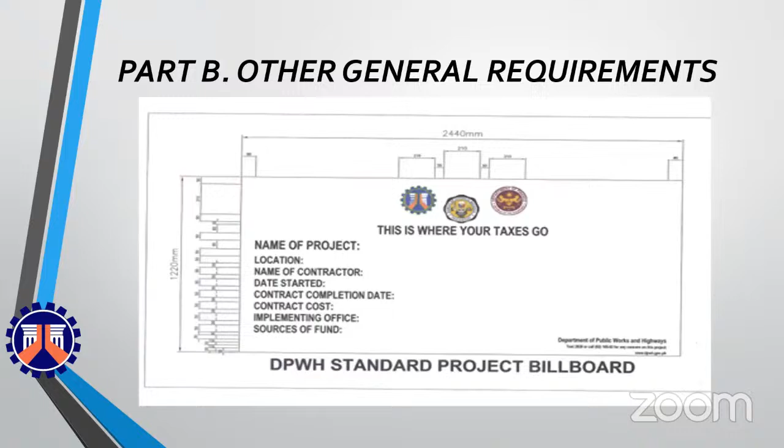Minimum material testing equipment for medium contractors, for contract ID numbers 24D00174, 24D00179, 24D00180, 24D00105, 24D00132, and 24D00100. Showing you the minimum materials testing equipment for medium contractors.

For contract ID number 24D00174, asphalt overlay along Daang Maharlika, Atimonan, Quezon. Showing you the project site.

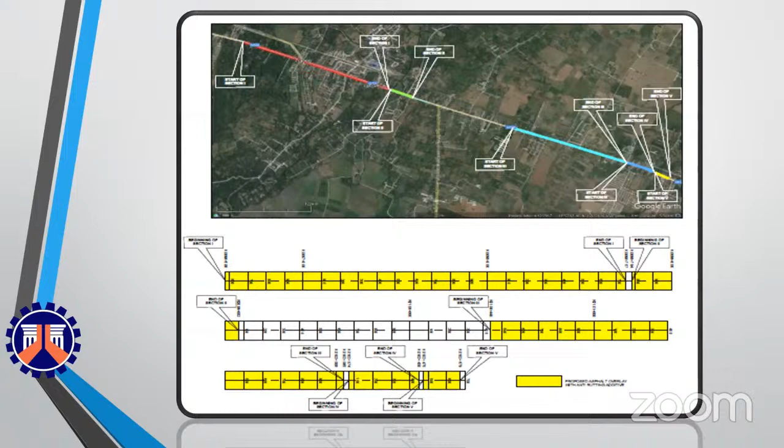Equipment requirements. Showing you the minimum major equipment requirements for the contract ID.

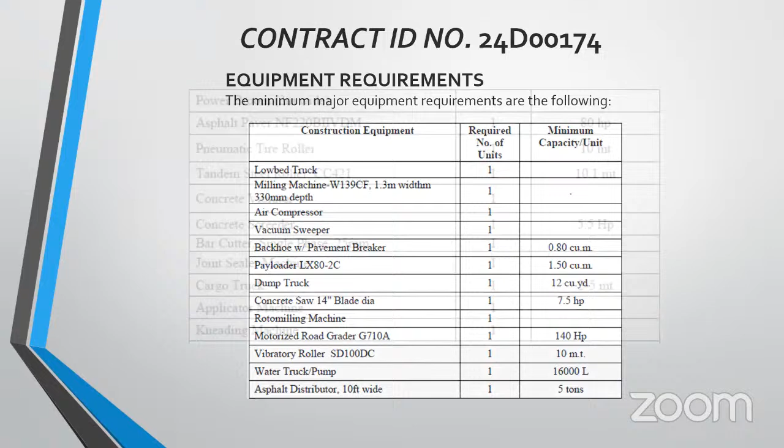The approved budget for the contract is 38,600,000 pesos, and the contract duration is 90 calendar days.

The source of fund is FY 2024 GAA for DPWH Infrastructure Program.

Scope of work: the scope of works involves finishing and other civil works, and electrical and auxiliaries.

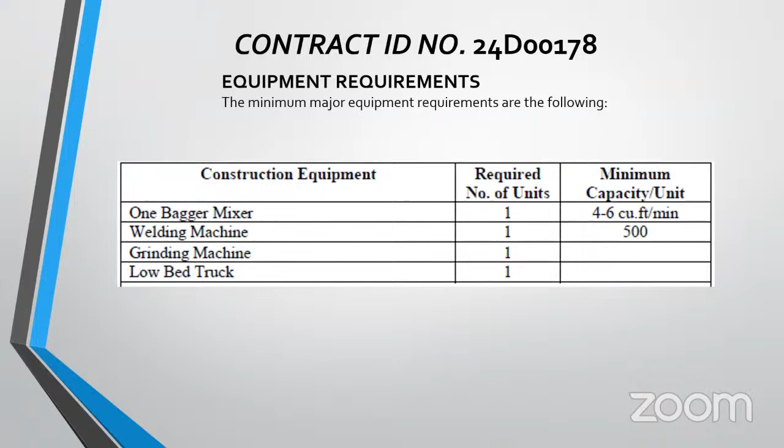The approved budget for the contract is 19,300,000 pesos, and the contract duration is 180 calendar days.

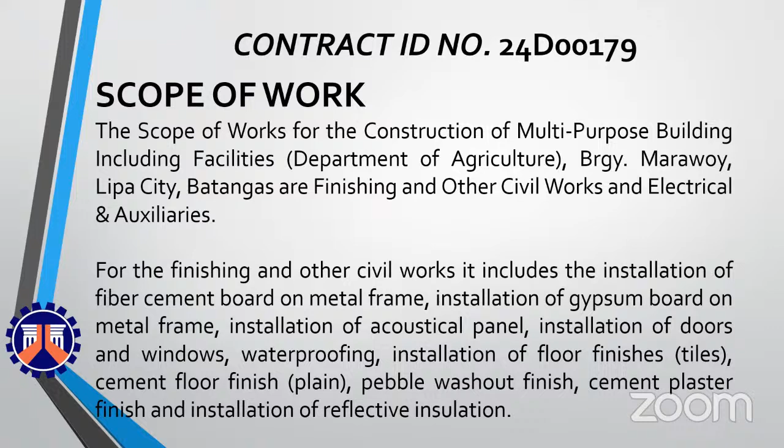For the electrical and auxiliaries, it includes the installation of intermediate metal conduit, diameter from 15 mm to 100 mm, installation of flexible metal conduit, boxes and fittings, and also installation of electric wires and other wiring devices.

Installation of panel board with main and branches breakers, of ground system, of ventilating equipment, air conditioning, ventilating system, automatic fire sprinkler system, and installation of fire hose cabinet and fire hose valves with cap.

Equipment requirements. Showing you the minimum major equipment requirements.

Manpower requirements. The minimum work experience requirements for the key personnel are the following.

The approved budget for the contract is 49,500,000 pesos, and the contract duration is 300 calendar days.

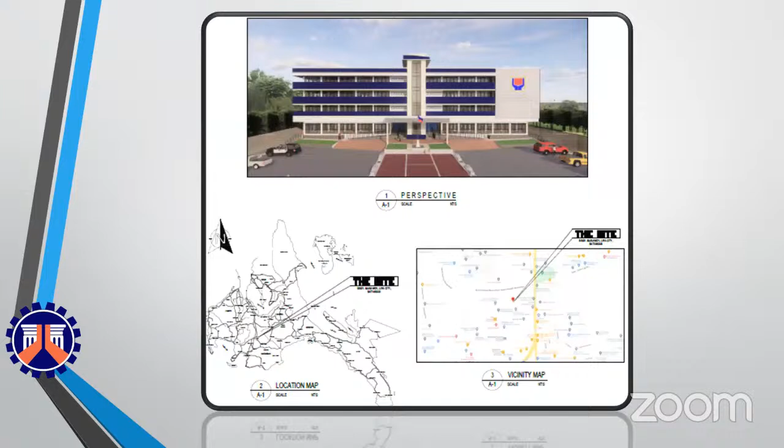For contract ID number 24D00180, construction of multipurpose building in Lipa City, Batangas. Showing you the perspective, location map, and vicinity map, and showing you the floor plans.

Scope of work. The scope of works for the construction of multipurpose building are earthworks, plain and reinforced concrete work, finishing and other civil works, and electrical and auxiliaries.

For earthworks, it includes clearing and grubbing, structure excavation, embankment, gravel fill, and site development. For the plain and reinforced concrete works, it includes structural concrete, lean concrete, reinforcing steel, formworks, and false work.

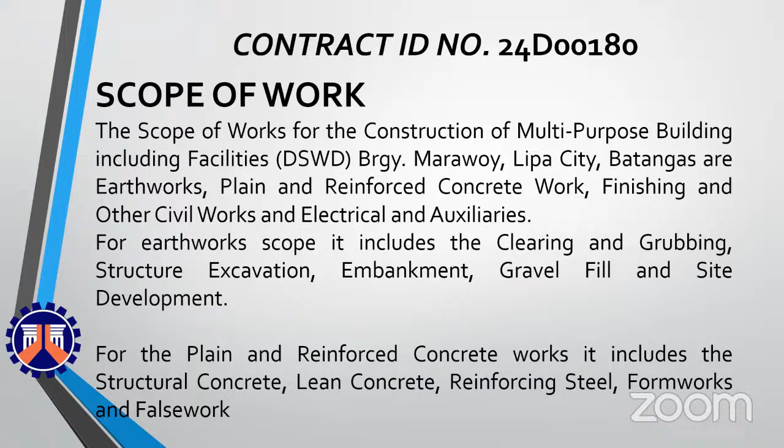For the finishing and other civil works, it includes soil poisoning, damp proofing, catch basin, hollow steel door, fire-rated exit steel doors and frames, aluminum framed glass door, aluminum glass windows, wood panel doors, roll-up door, tempered glass, waterproofing, glazed tiles and trims, unglazed tiles, cement floor finishes, cement plaster finish, painting works, CHB non-load bearing, louver blocks and railing.

For the electrical and auxiliaries, it includes fittings and accessories, wires and wiring devices, panel board, generator, lighting fixtures and lamps, network cabling, ventilating equipment, water pumping system, automatic fire sprinkler system, fire hose valve with cap.

Equipment requirements. Showing you the minimum major equipment requirements. Manpower requirements. The minimum work experience requirements for the key personnel are the following.

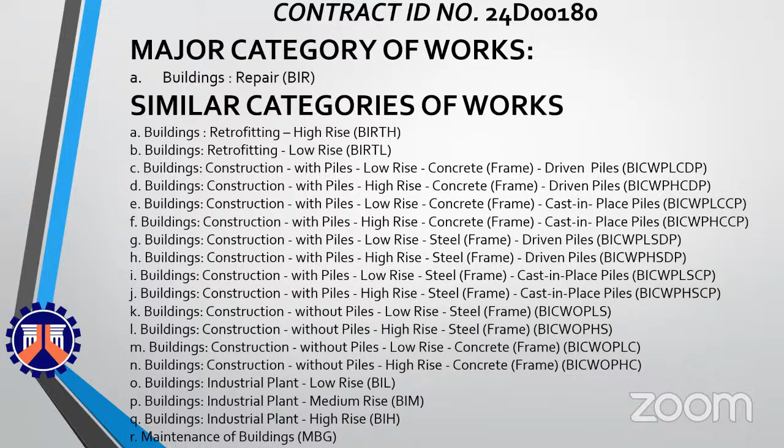The approved budget for the contract is 49,500,000 pesos and the contract duration is 300 calendar days. Showing you the major and similar categories of works.

The source of fund is FY 2024 GAA for DPWH Infra Program. Per contract ID number 24D00105, asphalt overlay along Daang Maharlika. Showing you the vicinity map and key map, as well as plans.

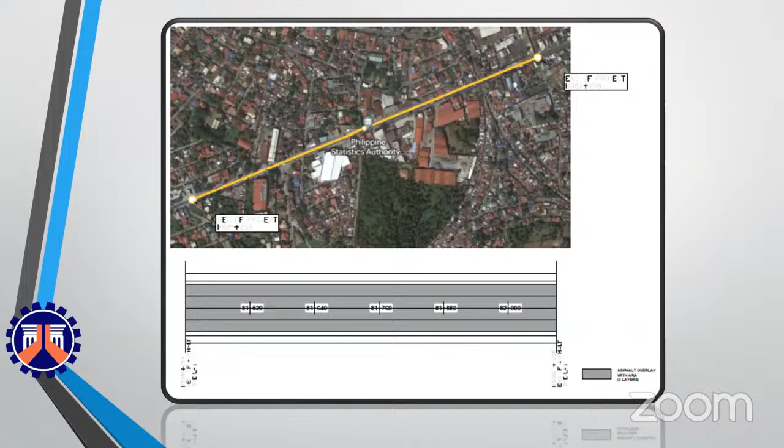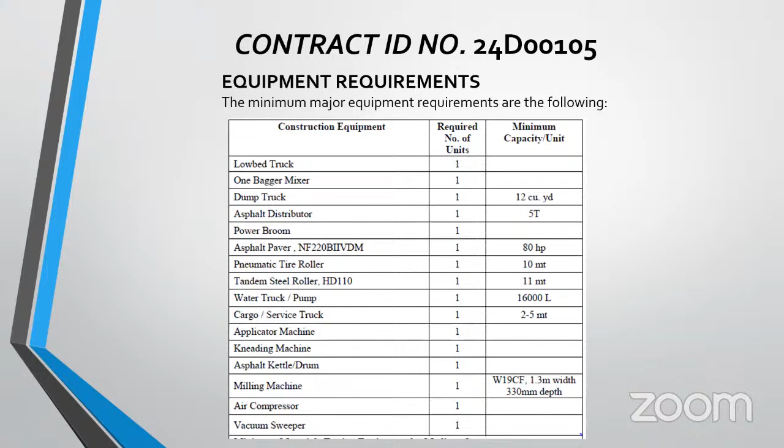Equipment requirements. The minimum major equipment requirements are the following. Manpower requirements. The minimum work experience requirements for the key personnel are the following.

The approved budget for the contract is 76,445,370 pesos and the contract duration is 165 calendar days. Showing you the major and similar categories of works. The source of fund is FY 2024 GAA for DPWH Infra Program.

For contract ID number 24D00131, asphalt overlay along Daang Maharlika. Showing you the project site.

Scope of work. Asphalt overlay on 4 lanes using emulsified asphalt, bituminous concrete surface binder course, bituminous concrete surface, hot laid 50 mm thick, and with pavement milling.

Equipment requirements. The minimum major equipment requirements are the following. Manpower requirements. The minimum work experience requirements for the key personnel are the following.

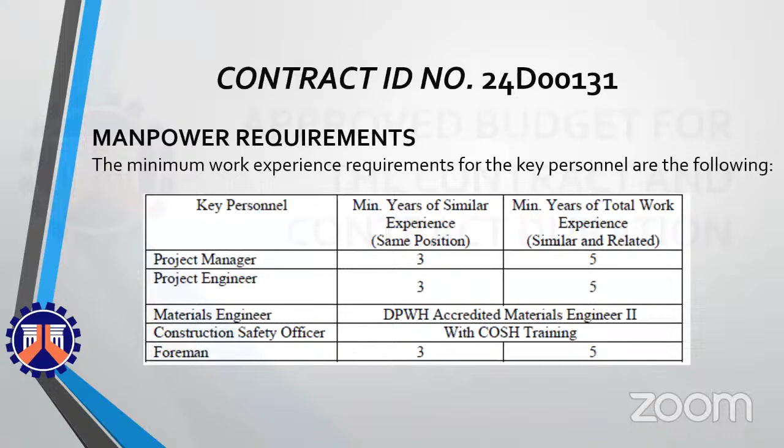Proposed asphalt overlay of 4 lanes using emulsified asphalt, bituminous concrete surface binder course, hot laid 50 mm thick, bituminous concrete surface wearing course, hot laid 50 mm thick, and bituminous concrete surface with anti-rutting additive, hot laid 50 mm thick.

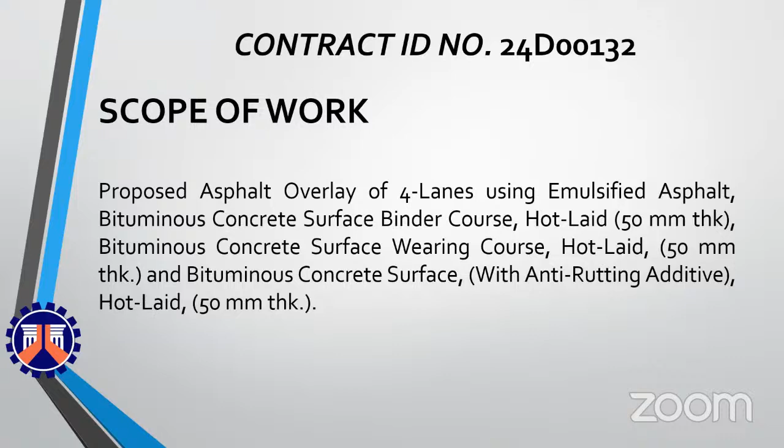For contract ID number 24D00100, asphalt overlay along Manila South Road. Showing you the vicinity map and key map.

Scope of work. Asphalt overlay of Manila South Road. Existing asphalt overlay will be removed and replaced with bituminous concrete surface wearing course, hot laid, 40 mm thick, and bituminous concrete surface binder course, hot laid, 40 mm thick. Reflectorized thermoplastic pavement markings will be applied after.

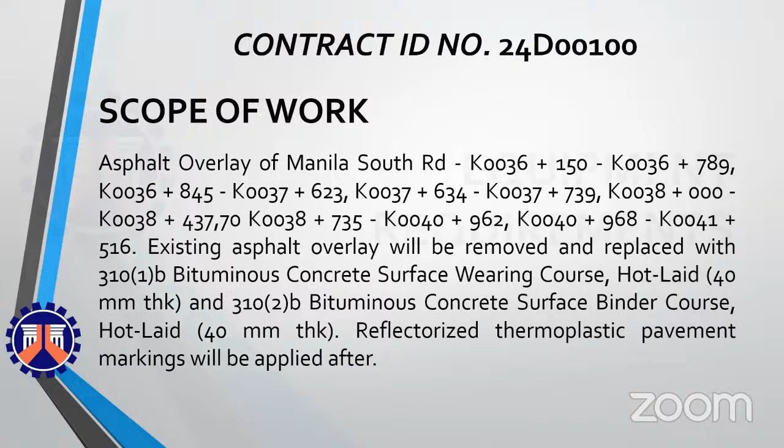That's all for the maintenance projects.

Thank you. Thank you.

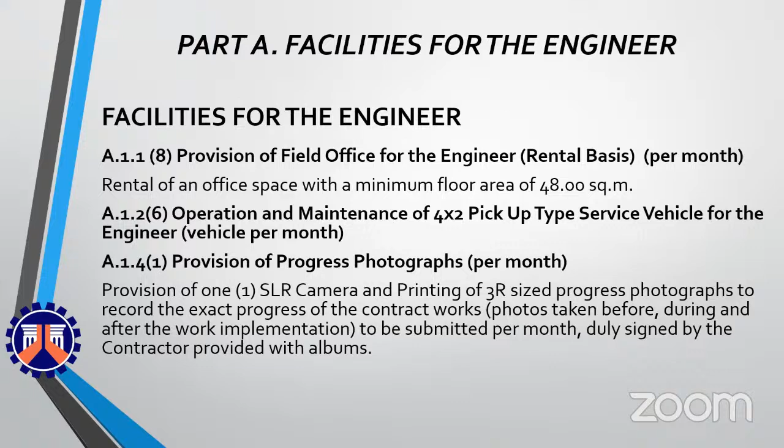Items of work, Part A, Facilities for the Engineer: A.1.1(8), provision of field office for the engineer, rental basis per month; A.1.2(6), operation and maintenance of 4x2 pickup type service vehicle for the engineer, per month; A.1.4(1), provision of progress photographs per month.

Part B, Other General Requirements: B.5, project billboard or signboard, each; B.71, Occupational Safety and Health Program, per month.

B.81, traffic management per month for contract ID numbers 24D0108, 109, 52, 66, 75, 85, 90, 154, 155, 171, 173, and 24D0190.

B.9, mobilization and demobilization, lump sum. B.12, removal and relocation of utilities, lump sum for contract ID number 24D075.

B.18.2, craneway, linear meter for contract ID number 24D0177. B.24, general scaffolding and shoring, lump sum for contract ID number 24D075. B.2611, signages, lump sum for contract ID number 24D075.

Minimum material testing equipment for small contractors for contract ID number 24D066. Showing you the minimum materials testing equipment for small contractors.

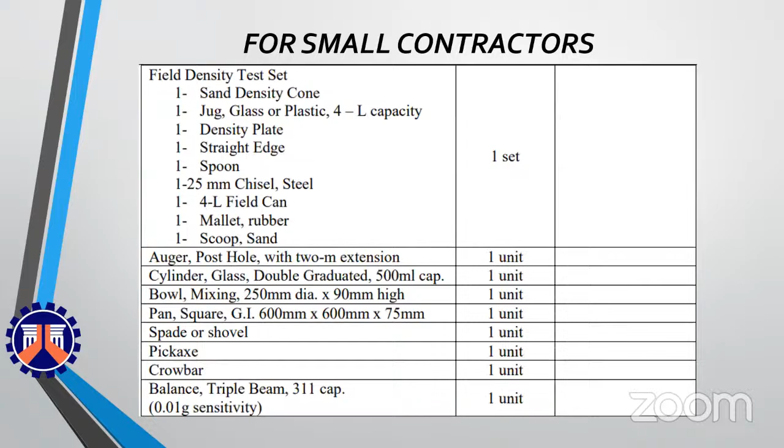Minimum material testing equipment for medium contractors for contract ID numbers 24D0175, 176, 108, 109, 52, 75, 85, 90, 154, 155, 171, 173, 177, and 190. Showing you the minimum materials testing equipment for medium contractors.

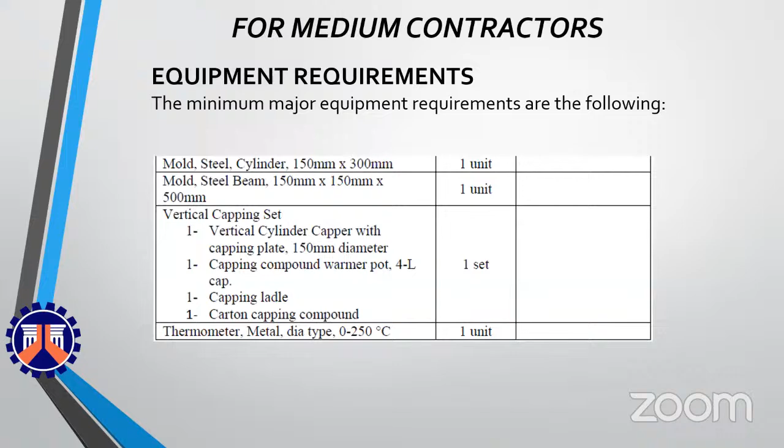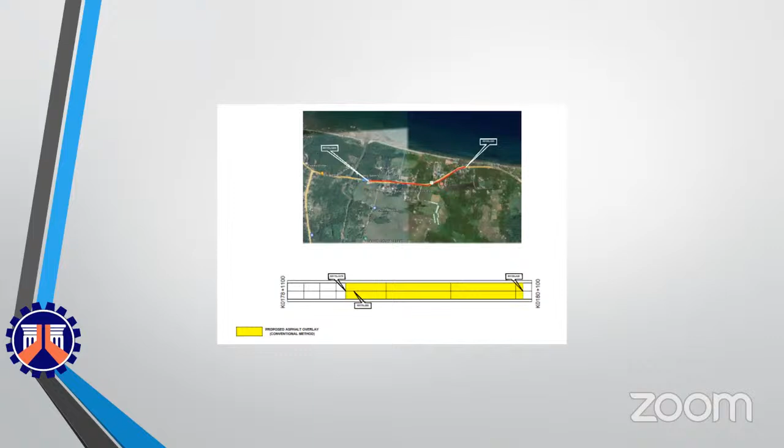Layout map and straight line diagram. Typical roadway section.

Scope of work: construction of 209 linear meter dike, segmented every 50 meters, with 0.20 meter thick reinforced concrete revetment and 0.6 meter thick rubble concrete with 5 meter crest width, and construction of 4 meter width reinforced PCCP of 0.28 meter thick with subbase of 0.25 meter thick, supported by 1.7 by 0.7 meter pile cap with 12 meter and 6 meter type 2 steel sheet pile at front and back of pile cap respectively.

For every 50 meters in length of the project, there is construction of an end section consisting of 0.2 meter thick reinforced concrete with 0.7 by 0.7 meter pile cap with 6 meter type 2 steel sheet pile.

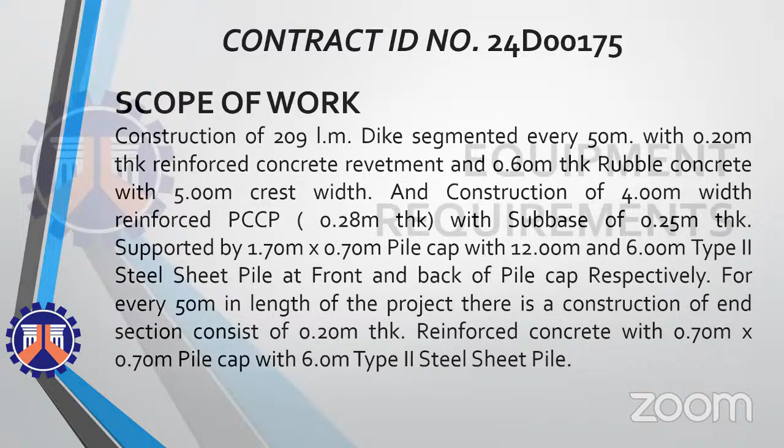Showing you the equipment requirements. Showing you the manpower requirements.

Approved budget for the contract is 99 million, with a contract duration of 240 calendar days.

Major category of works: flood control construction, slope protection using structural measures. Examples are revetment, retaining structures, and wire net. Showing you the similar categories of works.

The source of fund is FY 2024 GAA for DPWH Infra Program.

Contract ID number 24D0176, construction of flood control structure along Agus River, General Nakar, Quezon, Package O.

Showing you the key map, Calabarzon map, vicinity map, and location map. Proposed typical section.

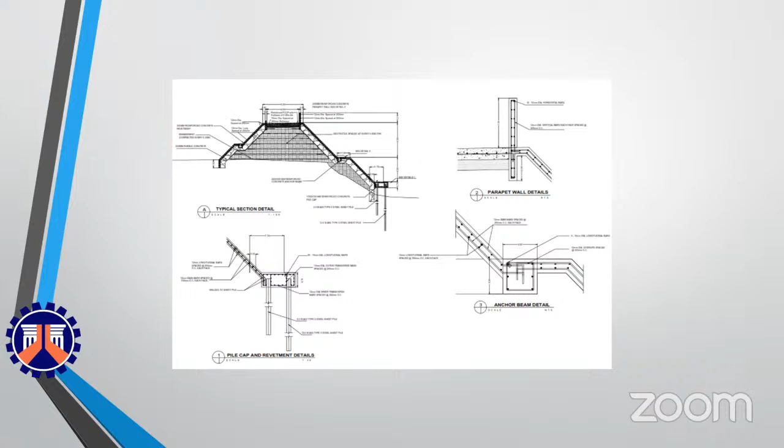Typical section detail. Typical end section detail.

Scope of work: construction of 168 linear meter dike segmented every 50 meters with 0.20 meter thick reinforced concrete revetment and 0.6 meter thick rubble concrete with 5 meter crest width, and construction of 4 meter width reinforced PCCP of 0.28 meter thick with subbase of 0.25 meter thick, supported by 1.7 meter by 0.7 meter pile cap with 12 meter and 6 meter type 2 steel sheet pile at front and back of pile cap respectively.

For every 50 meters in length of the project, there is a construction of end section consisting of reinforced concrete with 0.7 by 0.7 meter pile cap with 6 meter type 2 steel sheet pile.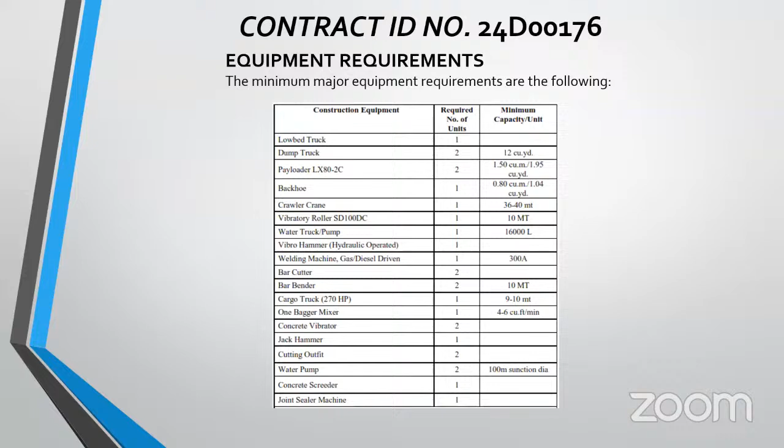Showing you the equipment requirements and manpower requirements.

Approved budget for the contract is 84,150,000 pesos, with a contract duration of 225 calendar days.

Major category of works: flood control, construction, slope protection using structural measures. Showing you the similar categories of works.

The source of fund is FY 2024 GAA for DPWH Infra Program.

Contract ID number 24D00108, Daang Maharlika. Kilometer 70 plus 40 to kilometer 72 plus 952, kilometer 75 plus 31 to kilometer 75 plus 437, and kilometer 76 plus 825 to kilometer 76 plus 973.

Showing you the vicinity map and key map, layout map, typical roadway section, and plan and profile.

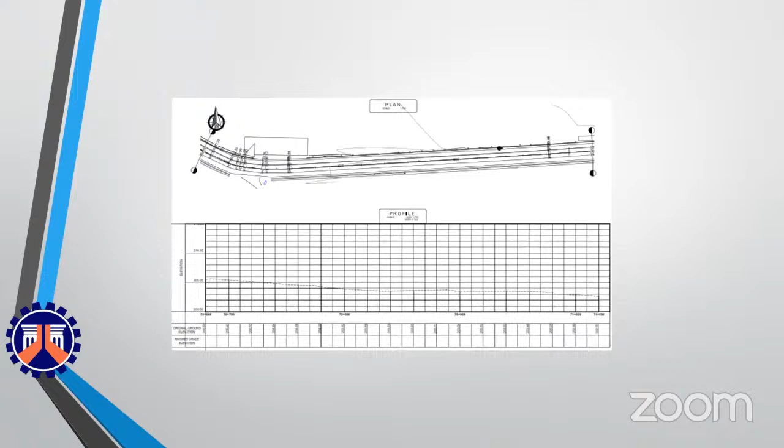Scope of work: reconstruction of 2 to 4 lanes of concrete pavement using 0.33 meter thick PCC pavement with macro synthetic fibers, and installation of pavement markings and road signs.

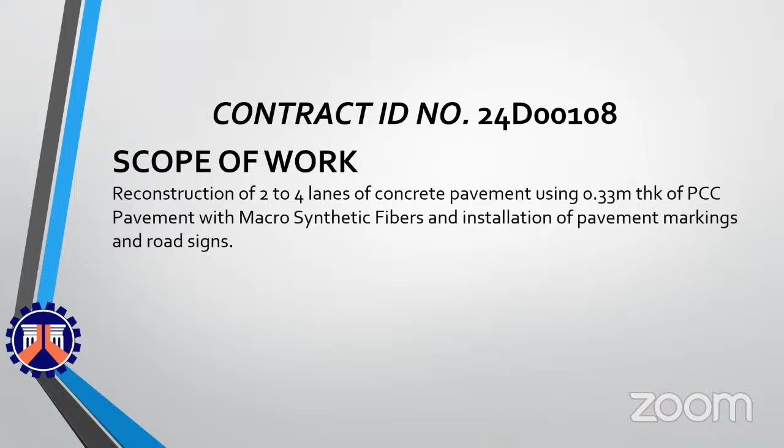Showing you the equipment requirements and manpower requirements.

Major category of works: roads, construction, PCCP, RCP. Showing you the similar categories of works.

The source of fund is FY 2024 GAA for DPWH Infra Program. Contract ID number 24D00109, Daang Maharlika, kilometer 78 plus 722 to kilometer 79 plus 366, kilometer 90 plus 42 to kilometer 90 plus 663, kilometer 90 plus 956 to kilometer 91 plus 353.

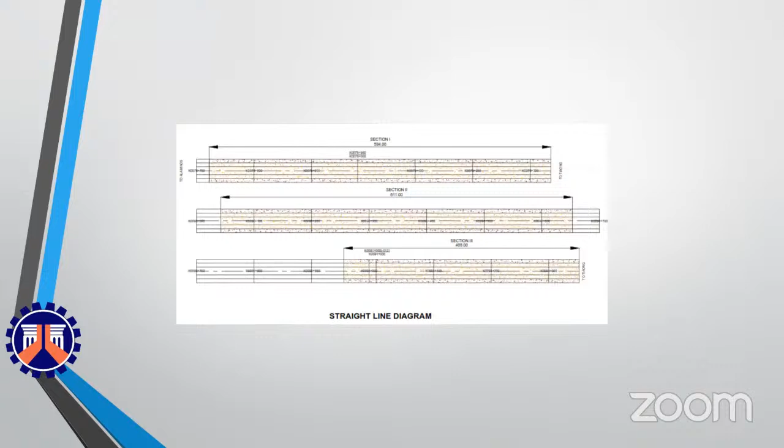Showing you the key map, Calabarzon map, layout map, straight line diagram, and typical road section on full improvement.

Scope of work: upgrading or reconstruction of existing carriageway and off-carriageway to PCCP with macro synthetic fibers of 0.33 meter thick, PCCP of 0.30 meter thick, shoulder and HDPE pipes of 1.2 meter diameter.

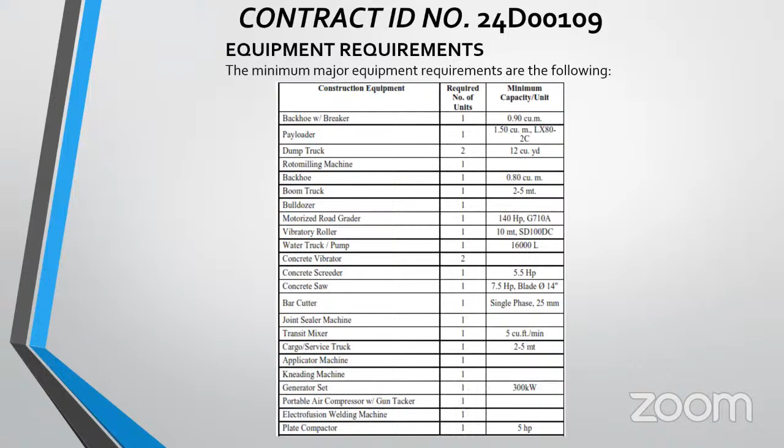Showing you the equipment requirements and manpower requirements.

Major category of works: roads, construction, PCCP. Showing you the similar categories of works.

The source of fund is FY 2024 GAA for DPWH Infra Program. Contract ID number 24D00052, Aguinaldo Highway, Governors Drive Interchange, Cavite.

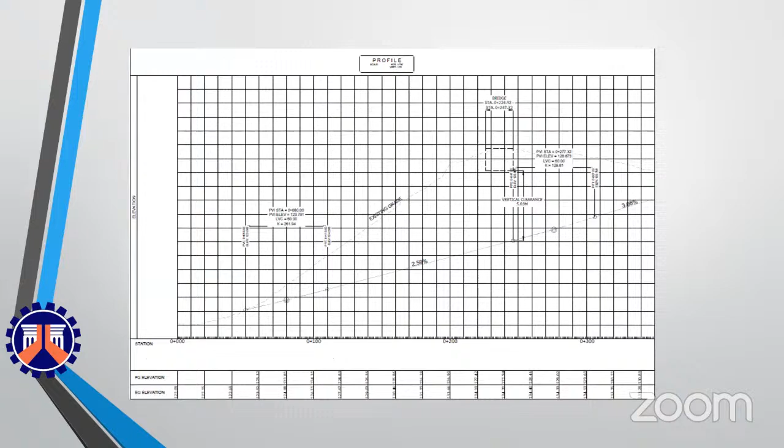Showing you the key map, vicinity map, layout map, straight line diagram, plan, profile, and typical road section at intersection.

Scope of work: construction of two-span flat slab with a total length of 22.4 meters as superstructure, supported by 21 pieces of 0.8 meter diameter concrete drilled piles as substructure for both abutments and pier.

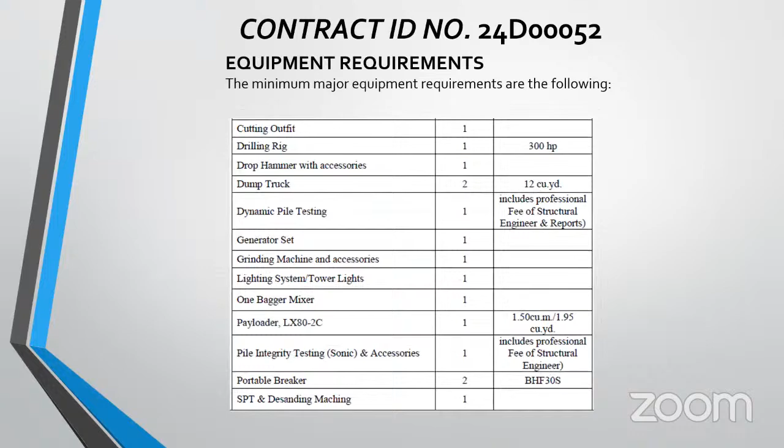Showing you the equipment requirements and manpower requirements.

Approved budget for the contract is 57,900,000 pesos, with a contract duration of 225 calendar days.

Major category of works: bridge, construction, concrete superstructure with cast-in-place piles. Showing you the similar categories of works.

The source of fund is FY 2024 GAA for DPWH Infra Program. Contract ID number 24D00066, Mauban Tignan Road, Mauban Side, Quezon.

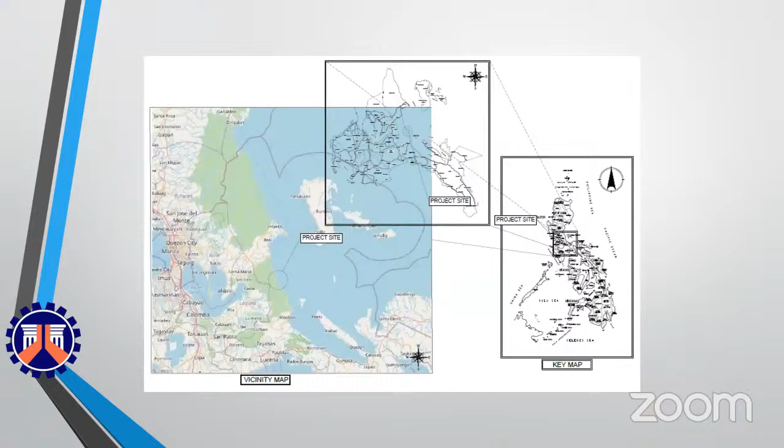Showing you the vicinity map and key map, and typical roadway section.

Scope of work: proposed concreting of 2 lanes, Portland cement concrete pavement of 0.28 meters thick with gravel shoulder on both sides.

Showing you the equipment requirements and manpower requirements.

Approved budget for the contract is 28,950,000 pesos, with a contract duration of 120 calendar days.

Major category of works: roads, construction, PCCP. Showing you the similar categories of works.

The source of fund is FY 2024 GAA for DPWH Infra Program. Contract ID number 24D075, Balagtas Flyover, Batangas City.

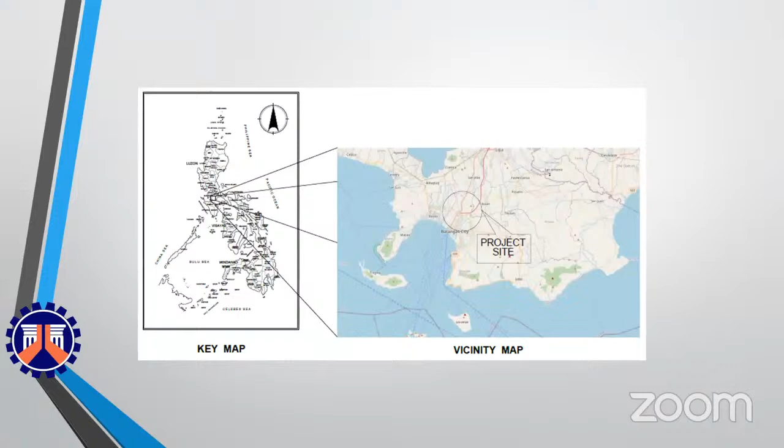Showing you the key map and vicinity map, layout, layout plan, and typical roadway section.

Scope of work: construction of flyover with street lights using MSE wall as slope protection.

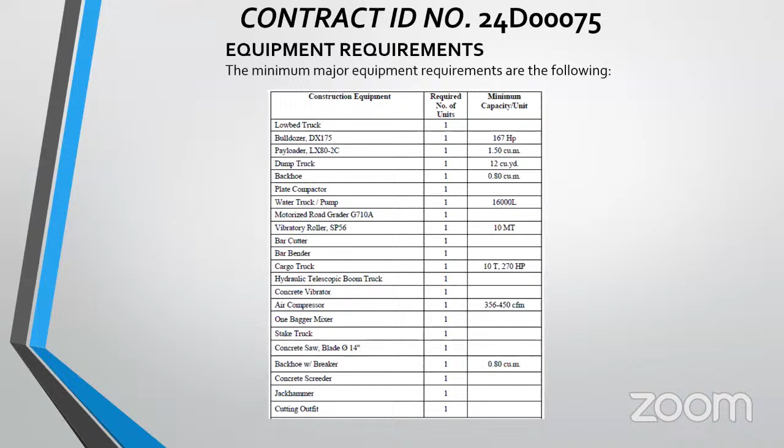Showing you the equipment requirements and manpower requirements.

Approved budget for the contract is 77,200,000 pesos, with a contract duration of 300 calendar days.

Major category of works: roads, construction, slope protection using structural measures. Examples are revetment, retaining structures, and wirenet. Showing you the similar categories of works.

The source of fund is FY 2024 GAA for DPWH Infra Program. Contract ID number 24D085, Aguinaldo Highway, Governors Drive Interchange, Cavite, Package B, Cavite.

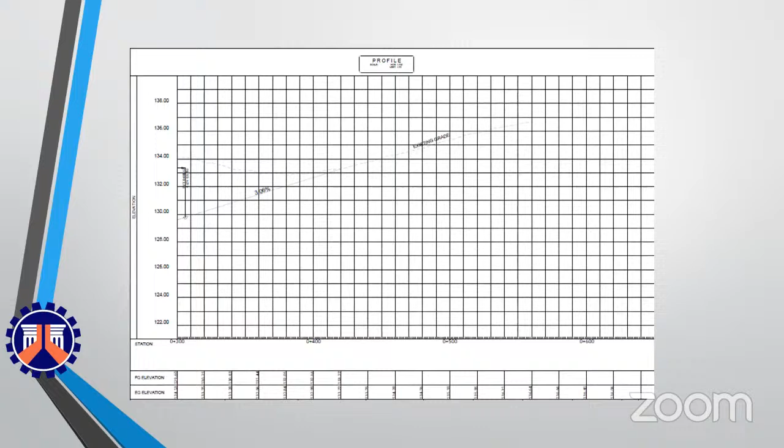Showing you the key map, vicinity map, layout map, and straight line diagram, plan and profile, and typical road section on intersection approaches.

For the scope of work: construction of slope protection structures, secant pile 0.80 meter diameter. Showing you the equipment requirements.

Show you the manpower requirements. Approved budget for the contract is 213,462,825 pesos with a contract duration of 300 calendar days.

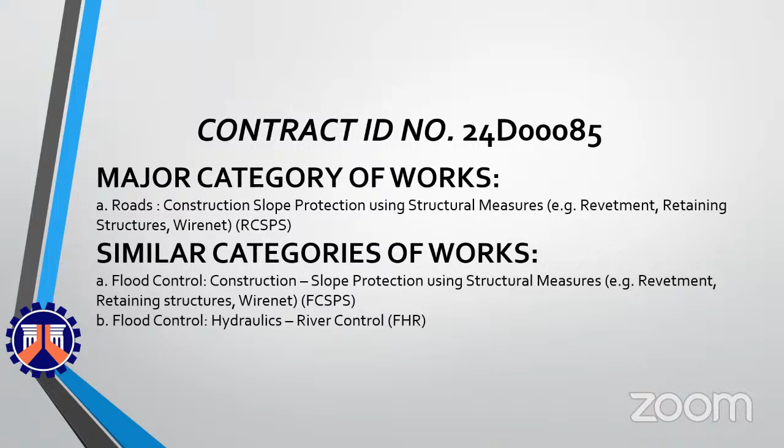Major category of works: roads construction, slope protection using structural measures. Examples are revetment, retaining structures, and wirenet. Showing you the similar categories of works.

The source of fund is FY 2024 GAA for DPWH Infra Program. Contract ID number 24D090, Construction of Carmona Biñan Extension Road, Cavite.

Show you the vicinity map and key map, straight line diagram, and typical roadway section. Scope of work: construction of...

2.696 lane kilometer concrete road and 1,348 linear meter of drainage lined canal, PCCP unreinforced 0.28 meter thick, 14 days. Aggregate sub-base course, PCC pavement unreinforced 0.23 meter thick, 14 days.

Structural concrete 20.68 megapascal, Class A, 28 days. Curb and gutter precast and sidewalks of 100 millimeter thick.

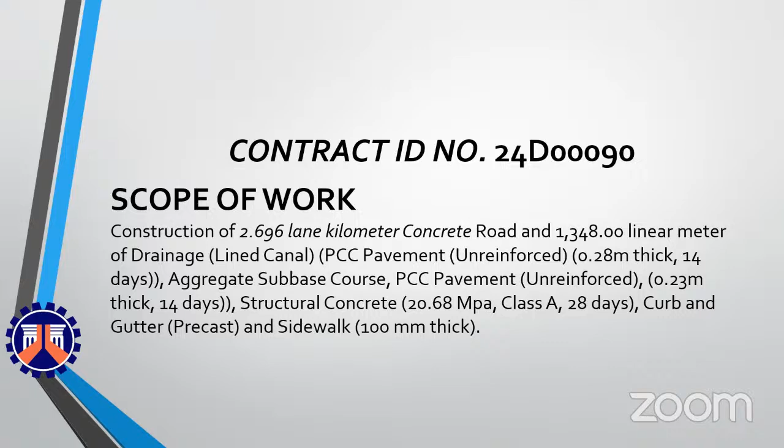Show you the equipment requirements. Showing you the manpower requirements.

Approved budget for the contract is 57,900,000 pesos with a contract duration of 270 calendar days.

Major category of works: roads construction, PCCP, RCP. Showing you the similar categories of works. The source of fund is FY 2024 GAA for DPWH Infra Program.

Contract ID number 24D00154, Daang Maharlika, Kilometer 223 plus 858 to kilometer 225.

Kilometer 225 plus 100 to kilometer 225 plus 292. Kilometer 225 plus 500 to kilometer 225 plus 560. Kilometer 225 plus 635 to kilometer 225 plus 665. Kilometer 225 plus 697 to kilometer 225 plus 716. Kilometer 225 plus 739 to kilometer 225 plus 762.

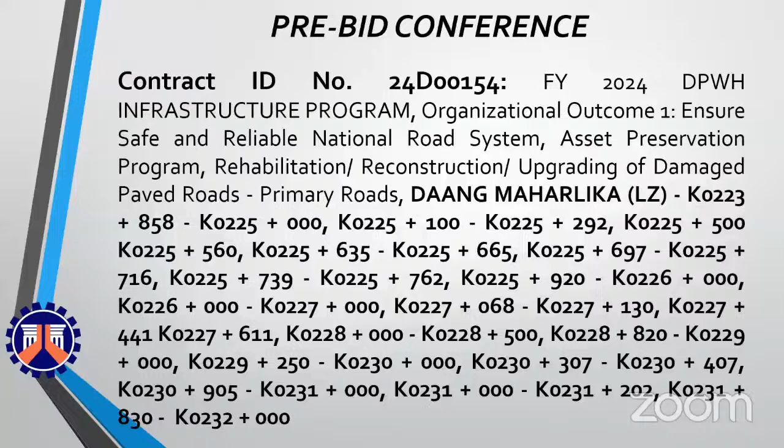Showing you the vicinity map and key map, layout map, and typical roadway section. Scope of work: proposed reconstruction of 2 lanes concrete road.

Showing you the equipment requirements and manpower requirements. Approved budget for the contract is 188,576,440 pesos with a contract duration of 300 calendar days.

Major category of works: roads construction, PCCP, RCP. Show you the similar categories of works. The source of fund is FY 2024 GAA for DPWH Infra Program.

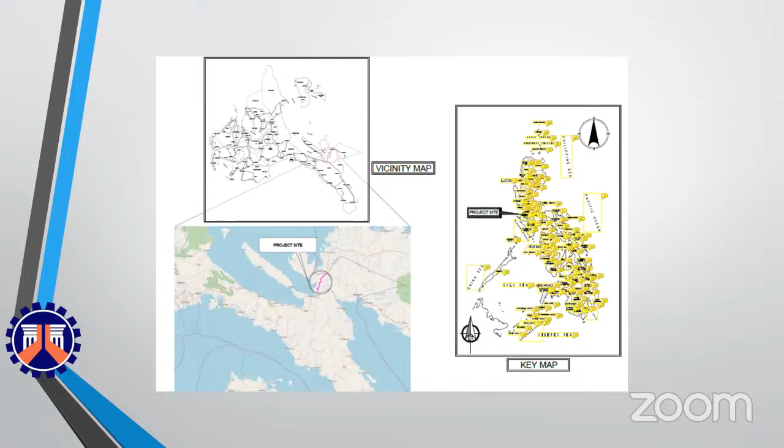Contract ID number 24D00155, Daang Maharlika. Show you the vicinity map and key map, layout map, and typical roadway section.

Straight line diagram. Scope of work: proposed reconstruction of existing 2-lane road, proposed widening of road from 2-lane to 4-lane with 1.5 meter width gravel shoulder on both sides.

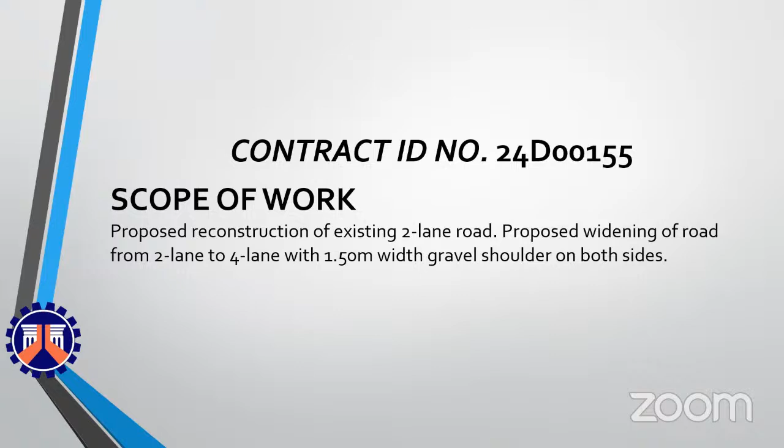Showing you the equipment requirements and manpower requirements. Approved budget for the contract is 269,597,840 pesos with a contract duration of 300 calendar days.

Major category of works: roads construction, PCCP, RCP. Show you the similar categories of works. The source of fund is FY 2024 GAA for DPWH Infra Program.

Contract ID number 24D00171, Rehabilitation of Laiya Malabrigo Road, Barangay Hugom, San Juan, Batangas, Phase 4.

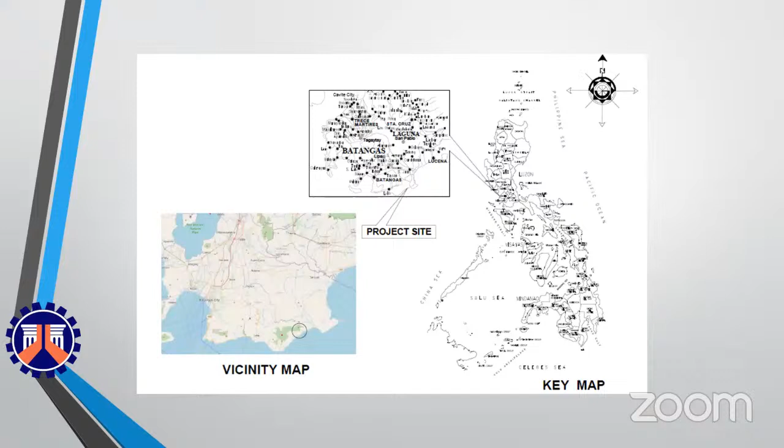Showing you the vicinity map and key map, layout map and straight line diagram, and typical roadway section. Scope of work: construction of 2-lane concrete road, aggregate sub-base course, gravel shoulder, installation of pavement markings, and installation of...

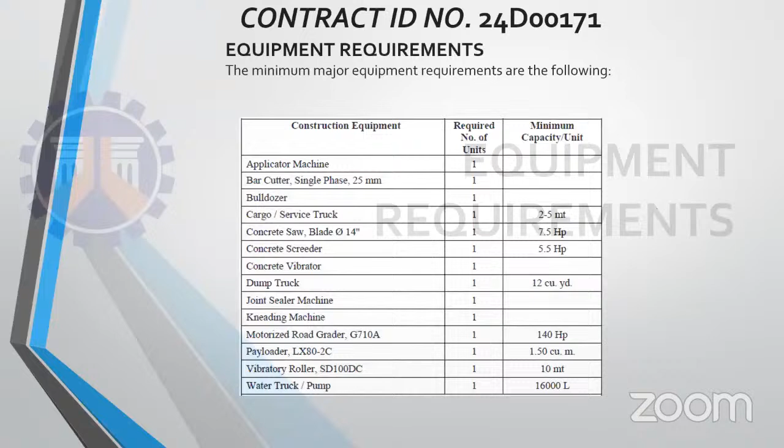Road signs. Show you the equipment requirements and manpower requirements. Approved budget for the contract is 99 million pesos with a contract duration of 210 calendar days.

Major category of works: roads construction, PCCP, RCP. Showing you the similar categories of works. The source of fund is FY 2024 GAA for DPWH Infra Program.

Contract ID number 24D00173, Star Tollway Pinamucan Bypass Package N, Batangas.

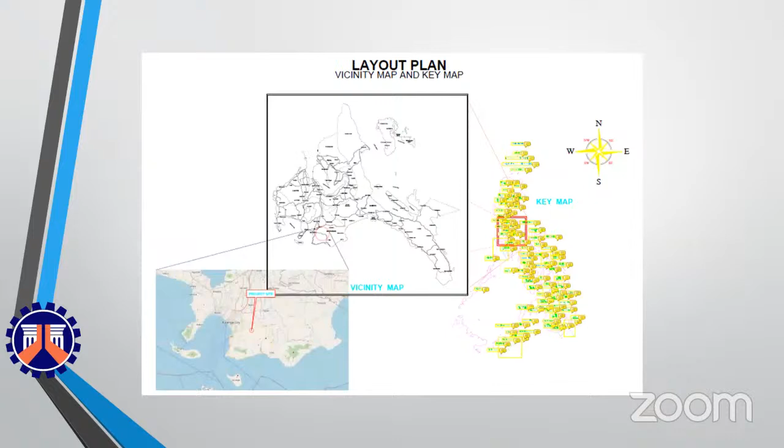Show you the vicinity map and key map, layout plan, and typical roadway section. Scope of work: construction of 4-lane, 0.28 meter thick PCCP, 0.23 meter thick PCCP for shoulder, reinforced concrete line ditch,

And installation of road safety devices. Showing you the equipment requirements and manpower requirements.

Approved budget for the contract is 139,925,000 pesos with a contract duration of 300 calendar days.

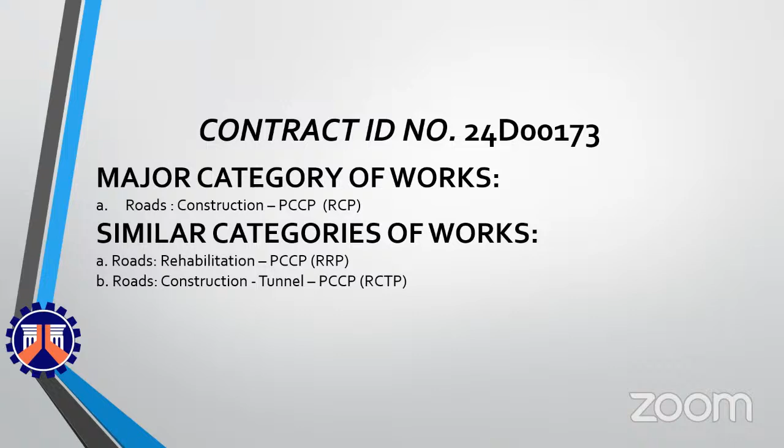Major category of works: roads construction, PCCP, RCP. Show you the similar categories of works. The source of fund is FY 2024 GAA for DPWH Infra Program.

Contract ID number 24D00177, Construction of road dike along Rio Grande River, Barangay Santiago, General Trias, Cavite, Phase 2.

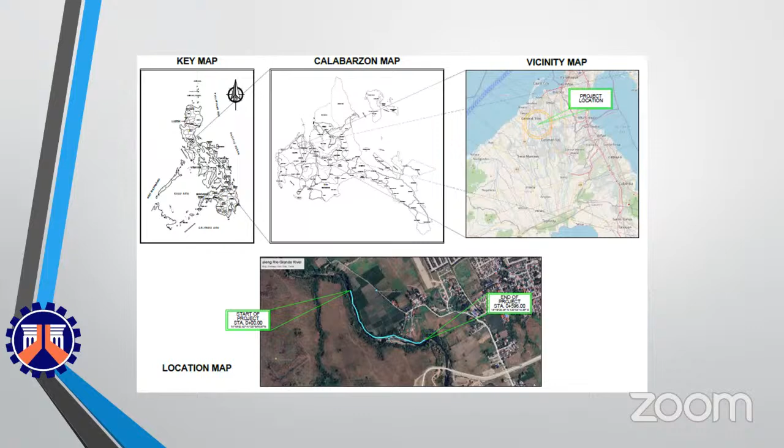Showing you the key map, Calabarzon map, vicinity map, location map, and typical section.

Scope of work: construction of reinforced concrete revetment with a height of 5.5 meters, 0.2 meter thick, resting on 0.5 by 0.7 meter reinforced concrete pile cap, foundation with 9 meter steel sheet piles, and parapet wall 1 meter by 0.2 meter dimension.

Equipment requirements.

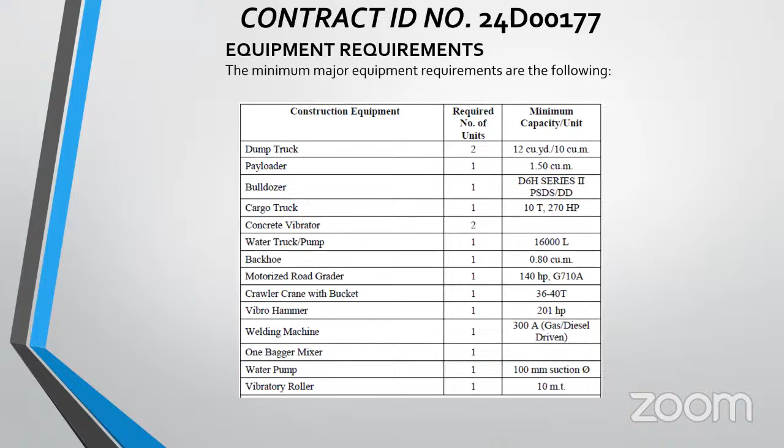Showing you the manpower requirements. Approved budget for the contract is 99 million pesos with a contract duration of 270 calendar days.

Major category of works: flood control construction, slope protection using structural measures. Examples are revetment, retaining structures, and wire net. Showing you the similar categories of works.

The source of fund is FY 2024 GAA for DPWH Infra Program. Contract ID number 24D00190: Binangonan, Angono, Taytay Diversion Road, Coastal Road Package 2.

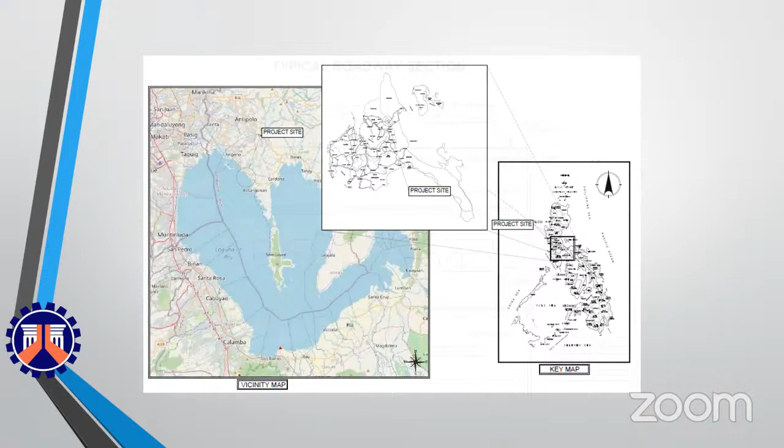Showing you the vicinity map and key map. Typical roadway section.

Scope of work: road embankment using boulder fills, structural backfill, and common borrow, with installation of high-density polyethylene pipe cross-drainage every 100 meters. Construction of reinforced concrete slope protection with hand-laid rocks and installation of Class 2 steel Z-pile on both sides.

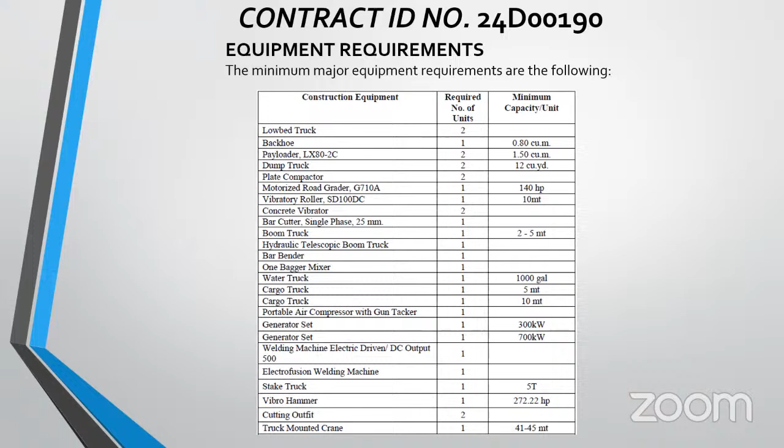Showing you the equipment requirements. Showing you the manpower requirement.

Approved budget for the contract is 142,820,000 pesos with a contract duration of 270 calendar days.

Major category of works: flood control construction, drainage, closed and open conduits. Showing you the similar categories of works. The source of fund is FY 2024 GAA for DPWH Infra Program.

Thank you po. That's all for the technical component of the projects.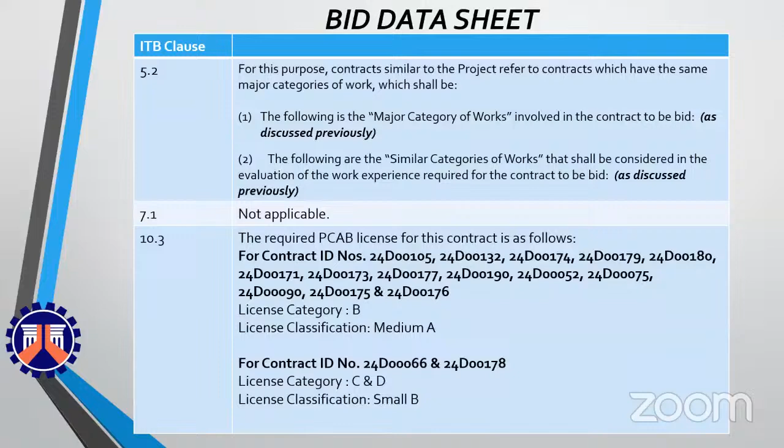For contract ID numbers 24D066 and 24D0178, license category C and D and license classification Small B. For contract ID number 24D0131, license category AA and license classification Large A. And for contract ID numbers 24D0100, 85, 154, 155, 108, and 109, license category A and license classification Medium B.

ITB clause 22: Bid submission may be done manually or electronically online. However, bidders should only select one mode of submission, either manual or electronic. The address for receipt of bids submitted manually is at Bidding Room, DPWH Region 4A, Canlubang Interchange, Barangay Mayapa, City of Calamba, Laguna, and electronically should be submitted at electronicbids_R4A at

dpwh.gov.ph. The deadline for receipt of bids is on March 5, 2024 at 10 a.m. for contract ID numbers 24D0174, 175, 176, 178, 179, and 24D0180.

And on March 6, 2024 at 10 a.m. for contract ID numbers 24D0105, 108, 109, 131, and 24D0132.

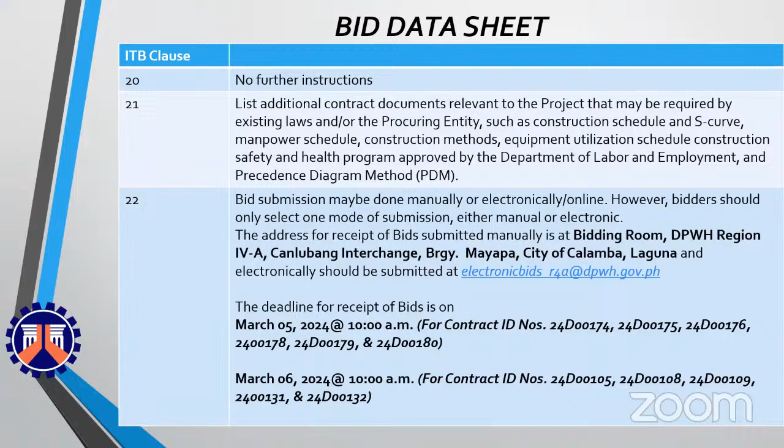On March 7, 2024 at 10 a.m., contract ID numbers 24D052, 75, 90, 85, 100, and 24D066.

And on March 8, 2024 at 10 a.m. for contract ID numbers 24D0154, 155, 171, 173, 177, and 24D0190.

For bids to be submitted electronically or online, the following procedures should be observed following Department Order Number 87 Series of 2020. GCC Clause Number 4.1: the procuring entity shall give possession of the site to the contractor upon the

receipt of the notice to proceed. The start date should not be later than 7 calendar days from the issuance date of receipt of the notice to proceed.

GCC Clause 7.2: in case of semi-permanent structures such as buildings of types 1, 2, and 3 as classified under the National Building Code of the Philippines, concrete asphalt roads, concrete river control, drainage, irrigation lined canals, river landing, deep wells, rock causeway, pedestrian overpass, and other similar semi-permanent structures, 5 years.

For contract ID numbers 24D0174, 175, 176, 105, 108, 109, 131, 132, 66, 75, 85, 90, 100, 154, 155, 171, 173, 177, and 24D0190.

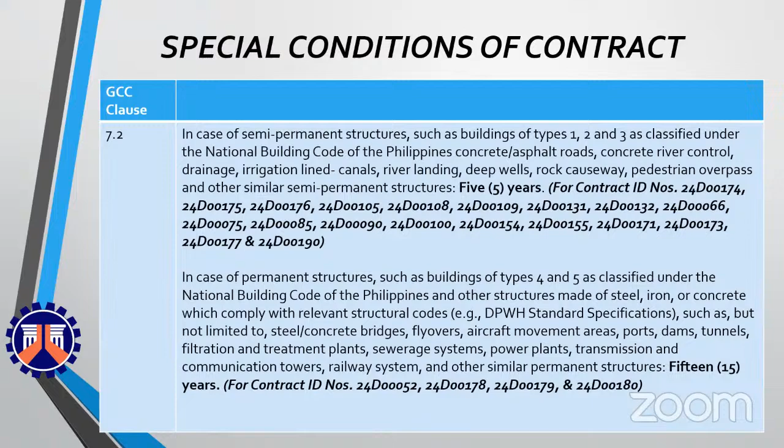Bid security: bidders are allowed to choose any of the following forms: cash, cashier's check, manager's check issued by a universal or commercial bank, 2% of ABC. Bank draft, guarantee, or irrevocable letter of credit issued by a universal or commercial bank.

If issued by a foreign bank, it shall be confirmed or authenticated by a universal or commercial bank, 2% of ABC. Surety bond callable upon demand issued by a surety or insurance company duly certified by the Insurance Commission as authorized to issue such security, 5% of ABC, and bid securing declaration.

Bids and bid securities shall be valid within 120 calendar days from the opening of bids.

Amount of bank guarantee, irrevocable letter of credit, cash, cashier's check, manager's check, 2% of ABC for contract ID number 24D0174, 772,000 pesos; contract ID number 24D0175, 1,980,000 pesos; 24D0176, 1,683,000 pesos; 24D0178, 386,000 pesos; 24D0179 and 180, 990,000 pesos.

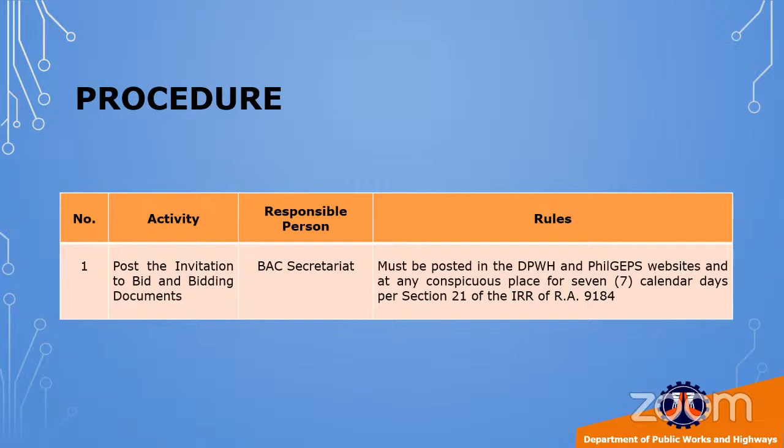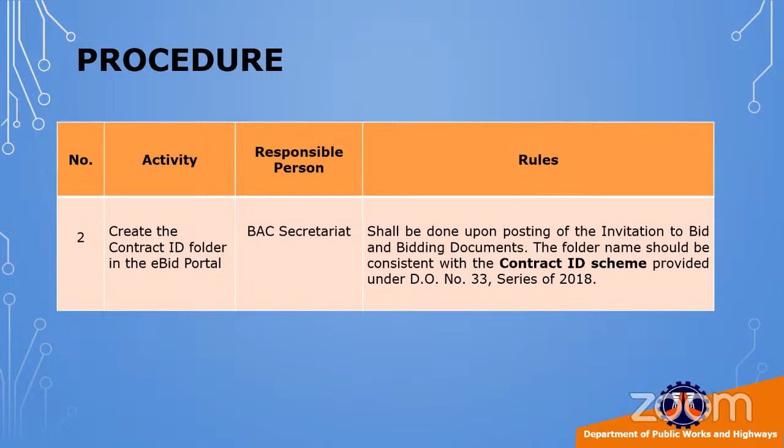The contractor shall purchase the bidding documents per Section 17.4 and Appendix 8, Guidelines on the Sale of Bidding Documents of the IRR of RA 9184. The applicable fee for the specific project is indicated in the invitation to bid.

Prior to the deadline of submission of bids, the prospective bidders shall send an email with subject 'official receipt for contract ID' to electronicbids_R4A@dpwh.gov.ph. Attached to the said email is the copy of the official receipt of purchase of bidding documents in portable document format PDF, with file name in the format PCAB_ID_contract.

The file name format is PCAB_ID_contractID_official receipt.pdf. For example, the file name of the attached PDF containing the official receipt of the contractor with PCAB ID number 12345, who intends to participate in the bidding of contract ID number 21D00001, shall be 12345_21D00001_official receipt.pdf. Further, the email subject would be official receipt for 21D00001.

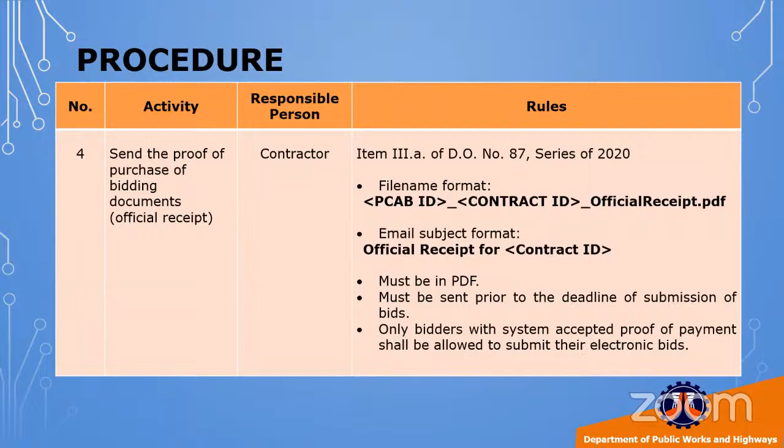Upon submission of electronic proof of purchase of bidding documents or the OR, the contractor may now send its electronic bid with file name format PCAB_ID_contractID_bid.zip or .rar or .7z, with email subject format 'bid submission for contract ID'.

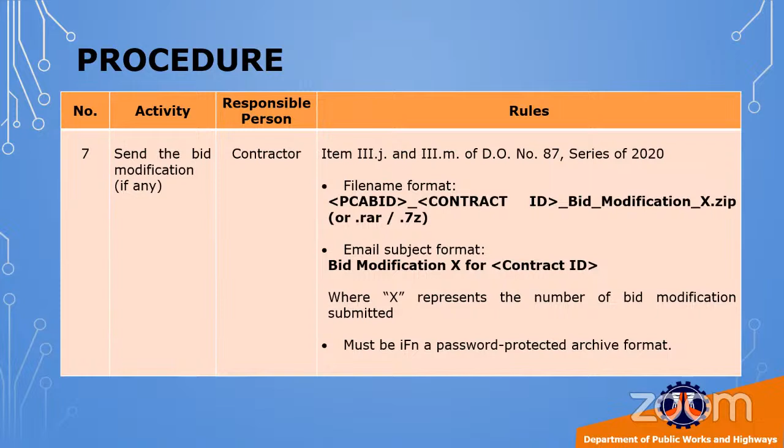This is the same prescribed format in the preparation and submission of electronic bid, except that the bid modification main archive file folder shall be labeled as PCAB ID underscore contract ID underscore bid modification underscore x dot zip or dot rar or dot 7z.

In case a prospective bidder who has purchased a bidding document decides not to participate, he may submit his letter of non-participation manually or electronically. For electronic submission, the contractor shall send an email with the subject non-participation for contract ID, with the letter of non-participation as attachment, file name PCAB ID underscore contract ID underscore non-participation.pdf. This email should be sent to electronic bids underscore R4A at dpwh.gov.ph before the deadline for bid submission.

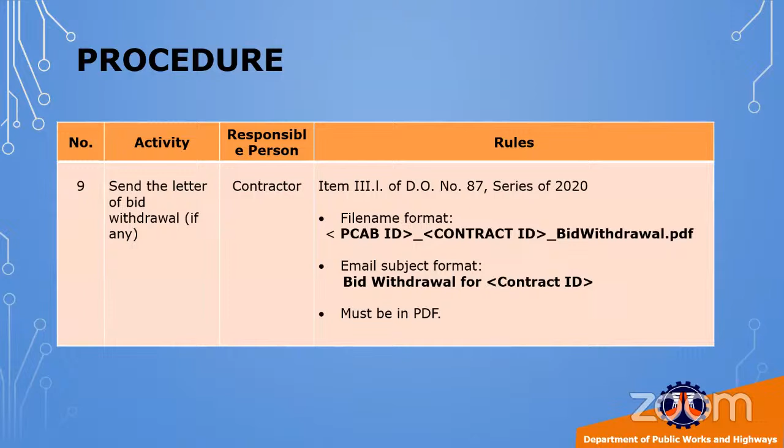Bids may only be withdrawn prior to the deadline for bid submission. For withdrawal of an electronic bid, the bidder shall send an email with the subject bid withdrawal for contract ID, with the letter of bid withdrawal in PDF format, file name PCAB ID underscore contract ID underscore bid withdrawal.pdf, attached. This email should be sent to electronic bids underscore R4A at dpwh.gov.ph before the deadline for bid submission.

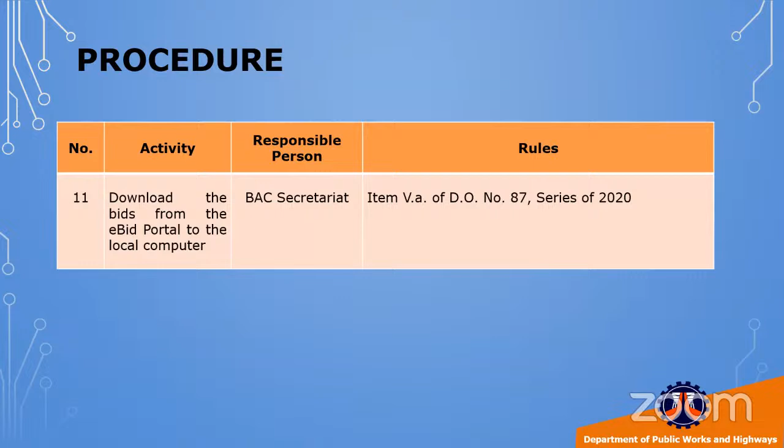Only during the actual opening of bids shall the bidder disclose the passwords for his electronic bid. This can be done by the bidder's authorized representative verbally in person, through phone call, online platforms, or through writing. In all cases, bidders will have only 3 attempts or 15 minutes, whichever comes first, to provide the correct password. Otherwise, the bidder shall be disqualified, except in unforeseen justifiable circumstances. The bidder may also be subjected to the 3-strike policy as warranted by the circumstances.

If the bidder chooses to disclose the password through phone call, he should make sure that the contact numbers recorded in the Civil Works application are open when the BAC calls to ask for the password. The bidder may also choose to call the BAC number during the bid opening time and wait for the opening of his bid to disclose the password.

For online or video calls, the bidder may call the BAC Messenger account. If the bidder chooses to attend the bid opening through online conference, the bidder should join the meeting using the given link.

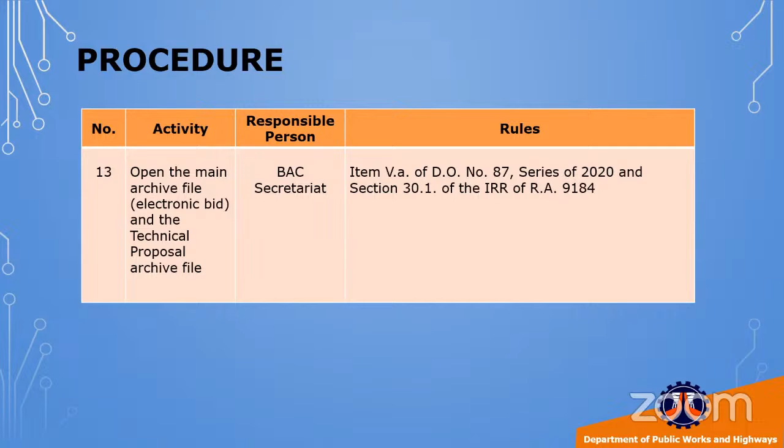All electronic bids' password-protected compressed archive main file folders shall be opened first for the opening of the technical component compressed archive file folders. This shall be followed by the opening of the bids submitted manually, for the opening of the technical component envelopes. The same procedures apply for the financial component compressed archive file folders and financial component envelopes. The BAC Secretariat shall open the financial proposal archive file.

Notes and reminders for the contractors in the preparation and submission of bids.

Only bidders with system-accepted proof of payment shall be allowed to submit their electronic bids, which shall not be beyond the deadline specified for the submission of bids.

An email shall also be received by a prospective bidder in instances where their sent email related to the submission of electronic bid or purchase of the bidding documents has an incorrect subject contract ID, meaning a corresponding folder with the same contract ID does not exist in the eBid portal; if it has no attachment; if it has an attachment but not in the prescribed format; if it has more than one attachment; or if it was received after the deadline of bid submission. For these cases, prospective bidders should rectify or correct the noted deficiencies to comply with the requirements for its electronic bid to be accepted.

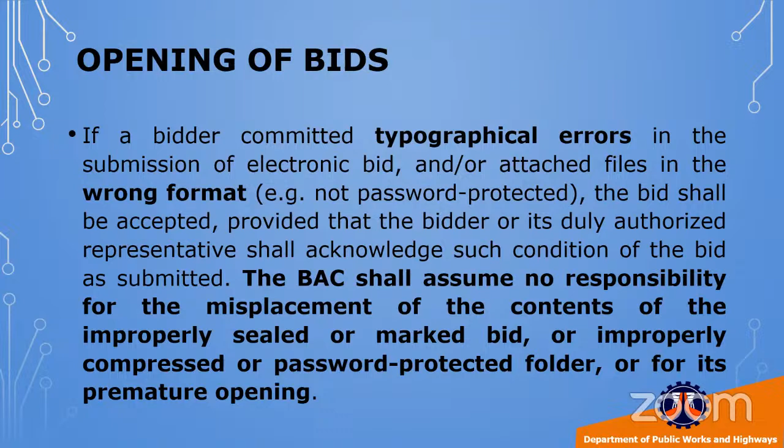If an electronic bid or file was found to be damaged and could not be extracted or opened, the bid shall be considered failed.

Notes and reminders for non-participation and bid withdrawal. In case of non-participation and withdrawal of bids, the BAC Secretariat shall check the letters of non-participation or bid withdrawal received in the dedicated email address and stored in the eBid portal, and shall observe the provisions under Section 26.2 of the IRR of RA 9184 and DO 17 Series of 2015.